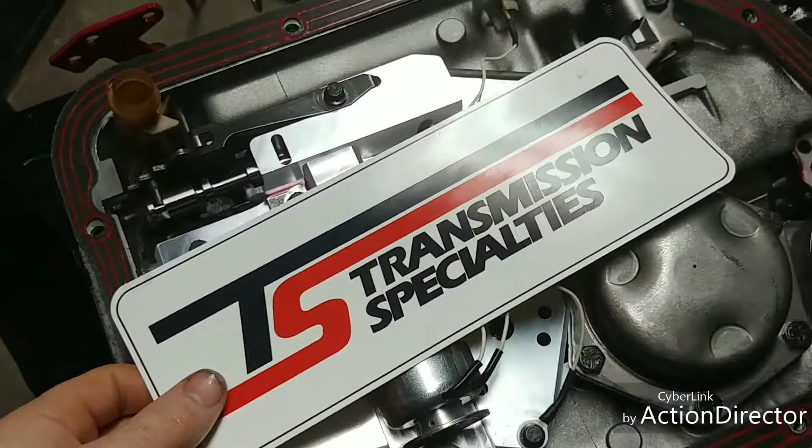Alright guys, TS Transmission Specialties, and this is our billet aluminum transbrake valve body for our TH400.

As you can see, there's actually not much to it. You got your transbrake here, and a real nice machined billet piece. I think Jegs sells these too under their brand name, but no... weird looking maze on the back. It's pretty straightforward - you got your park and neutral circuits, your reverse, and your 3 forward gears.

So anyhow, with this transbrake, the instructions say that you can put it in reverse or neutral to back up, but you will need to hit your transbrake button to complete the reverse circuit, so it applies fluid to your band and you can back up.

Nothing real difficult as far as putting it on. Kind of caught me off guard - I'm used to using valve body gaskets. This uses an aluminum separator plate and no gaskets between either the valve body or the case. So I assume that they figure the aluminum's soft enough to take up any minor imperfections in there and seal everything up.

They do recommend using like a whetstone or something to go over the case to make sure that there's no high spots on your transmission case. But other than that, you know, torque your bolts down. Make sure you put a little bit of ATF on the threads just to help lubricate them. Torque your bolts - I do like 100 inch-pounds on them.

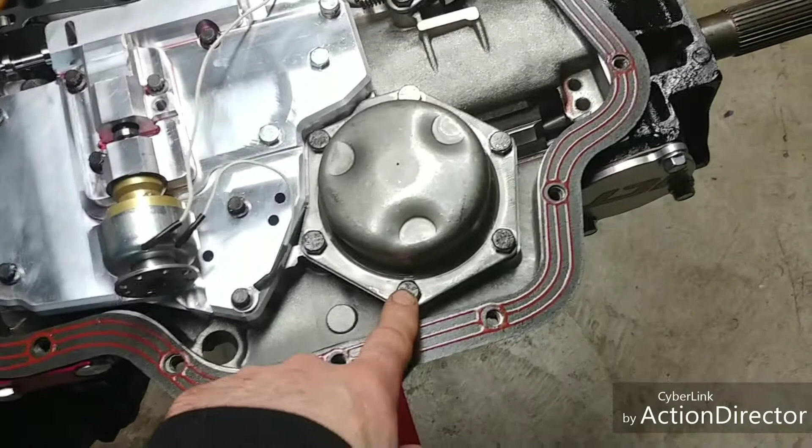So this might have been because on this rear servo cover, I ran what they call a low drag reverse shim, and what that does is it spaces this rear cover up like, I don't know, 120 thousandths of an inch, just to allow the rear band piston to relax fully so you don't get band drag on the rear drum. But the bolt may have been just a tad short.

The threads are cut pretty deep down in there, so I just got a longer bolt and ran it further down. Worked good, torqued good, everything's good there.

I know there are ways to adjust these rear band pistons, and usually what guys will do - you can find it online - is use a spare cover, drill a hole, tap it, thread a bolt in here, and cut this servo cover in half, then take some measurements as far as where the band actually starts to apply and where it releases. There's all sorts of adjustment stuff in there. I don't think I'm skilled enough to do all that and make an in-depth video, plus I don't have the servo and the spare cover to cut in half.

So anyhow, it didn't have any issues factory. When I took it apart, the band was actually in decent shape, and the drum was in decent shape. So I don't know, we'll let it ride, see what happens. If something goes south there and we have to pull this back out, well, you and I will learn at the same time then.

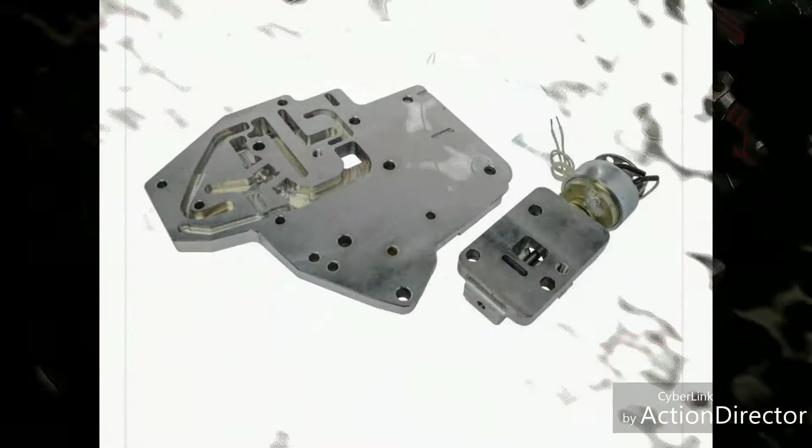I'll see if I can throw a picture in here of the backside of the valve body. I really wanted to do just an overview of the valve body and its individual pieces for you guys, but unfortunately I don't have the video, and at this point everything is installed and torqued, and doesn't make any sense to take it back apart.

So when you're putting it all together, make sure you clean everything before you install it, because the last thing you want is maybe the manufacturer missed some shavings and stuff when they were machining this valve body, and you got something in there. So just clean everything up real well, lubricate everything, lubricate your spool valve.

When you're installing this, sometimes these might have a little wobble to them until you get all the bolts tightened up. Just make sure that your valve goes in nice and easy and it's not bound up on anything. Lubricate your trans valve, your transbrake solenoid there. Make sure that all works nice and good, and just be careful tightening the bolts up, and follow your directions that come with your valve body.

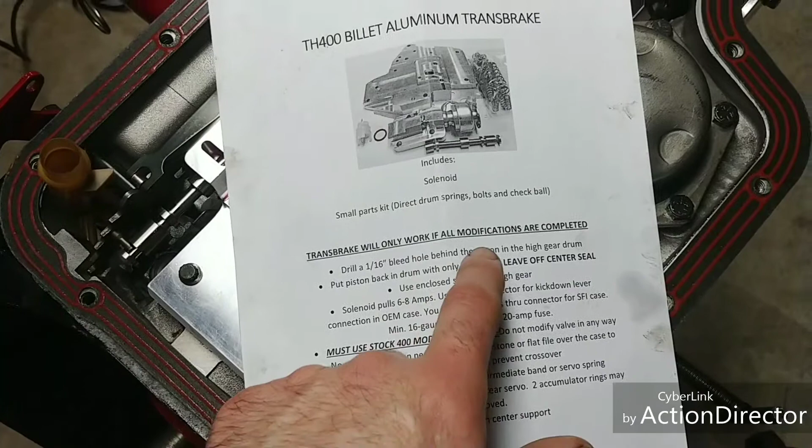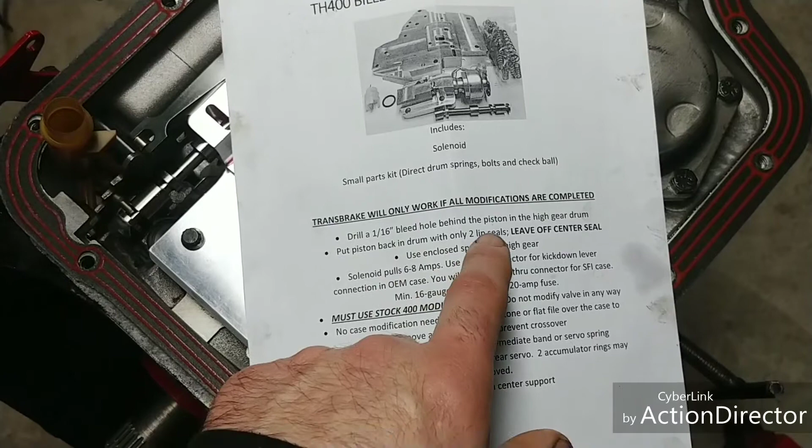But you are going to want to, this is why I kind of did this build, because there are modifications that you have to do. We went over drilling a 16th inch bleed hole in the direct drum, or they call it the high gear drum, whatever. Put the piston back in the drum with only 2 lip seals, leave the center seal off. We did that. They come with heavier duty springs for your direct drum, so we installed those.

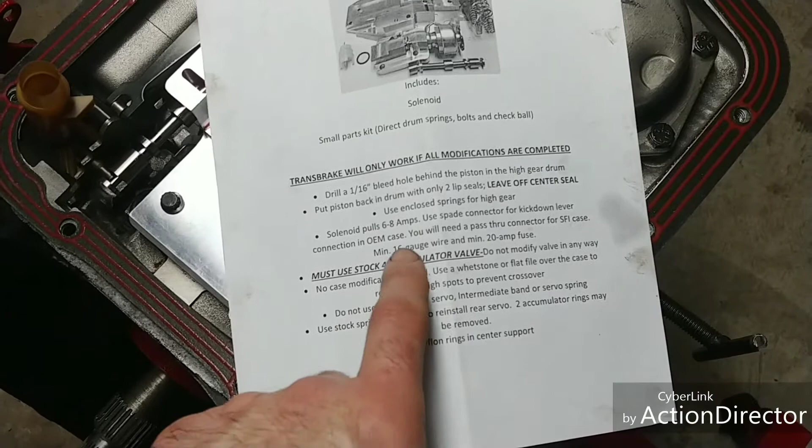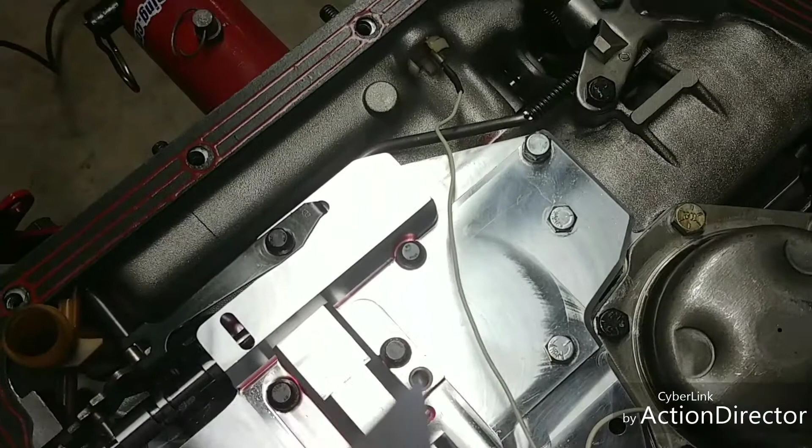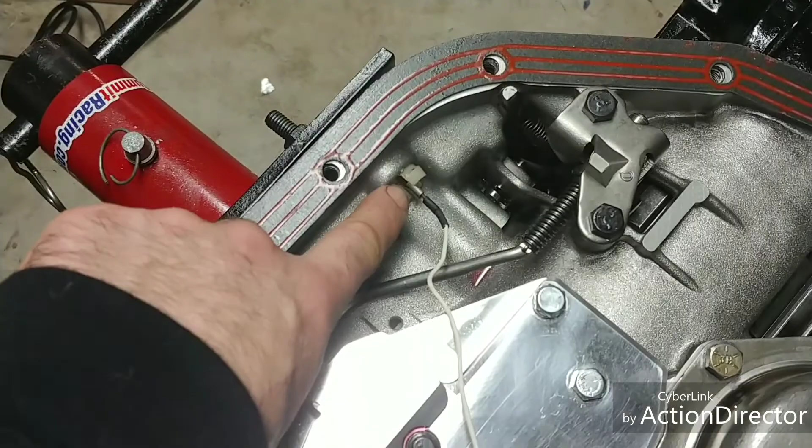It's got some electrical specs here. Solenoid pulls 6 to 8 amps. Use the spade connector for the kickdown lever. So in this one here, if you remember, originally right about in this area, you would have had a kickdown solenoid, and you would have had the little plastic feed through here. You got your terminal on the outside comes through, so that's what we're going to use now for our power for our transbrake. And then they just give you, you just ground it to the case here.

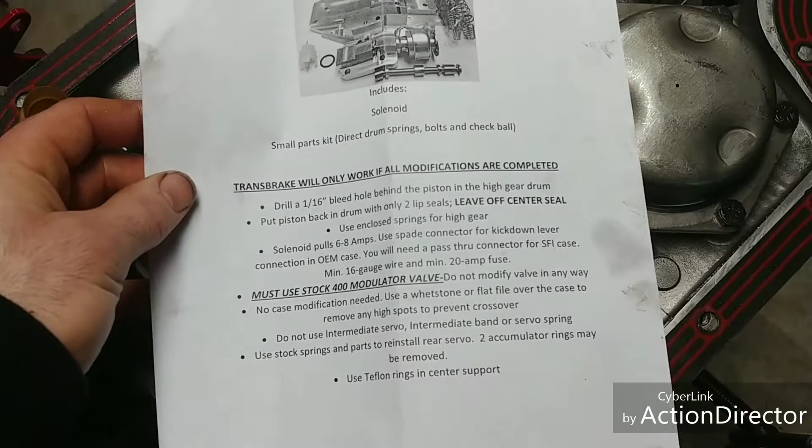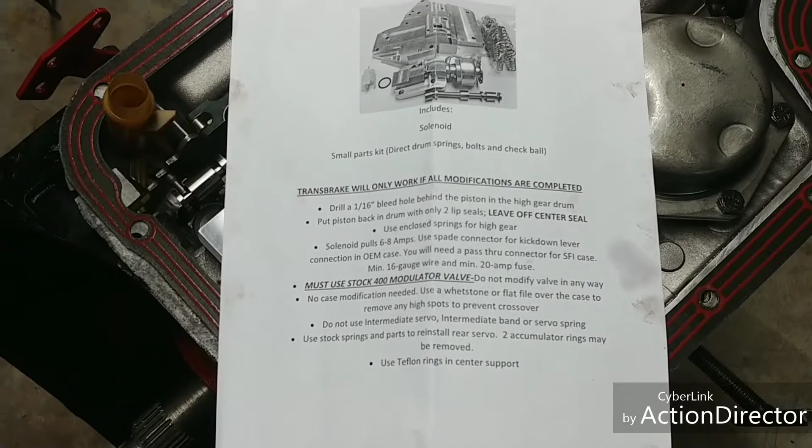So solenoid pulls 6 to 8 amps. You need a pass-through connector for an SFI case. I don't have the cash for an SFI case, so I really don't care what the hell they're talking about as far as a pass-through connector. If that is your situation, Google's your friend. Minimum 16 gauge wire and minimum 20 amp fuse.

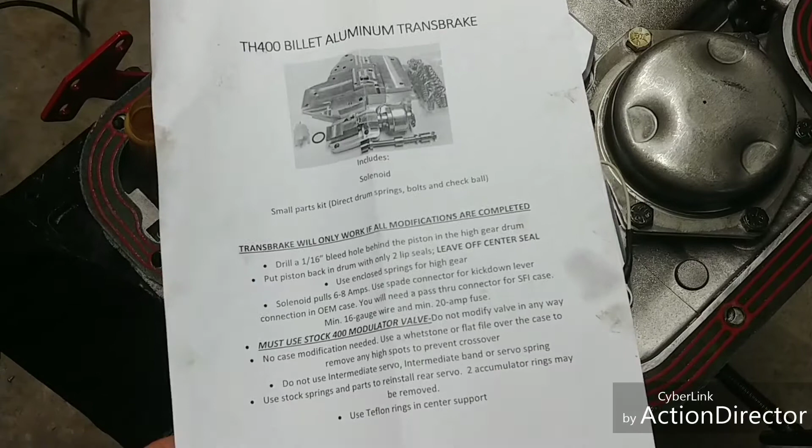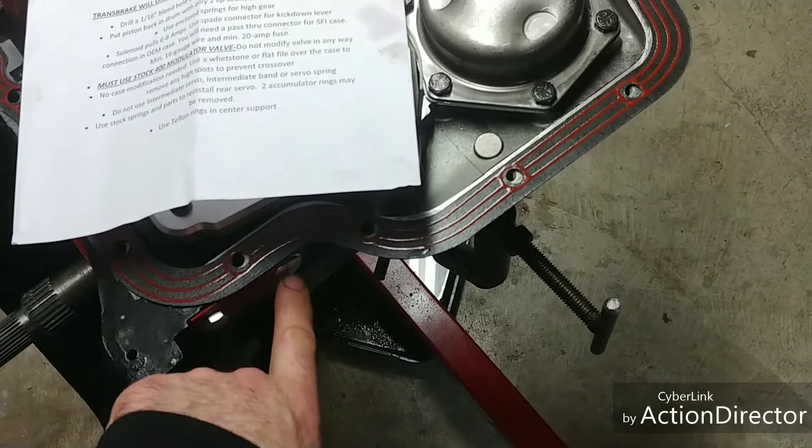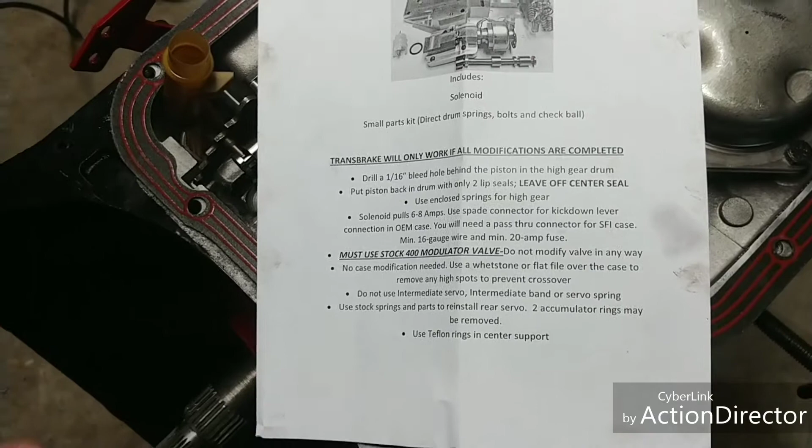Must use a stock 400 modulator valve. So your modulator valve in here, where you would have your vacuum modulator, they give you a plug. You have to use an unmodified modulator valve, so do not grind it or anything. There's different modifications out there for valve bodies, like stock looking stuff, and they want just stock.

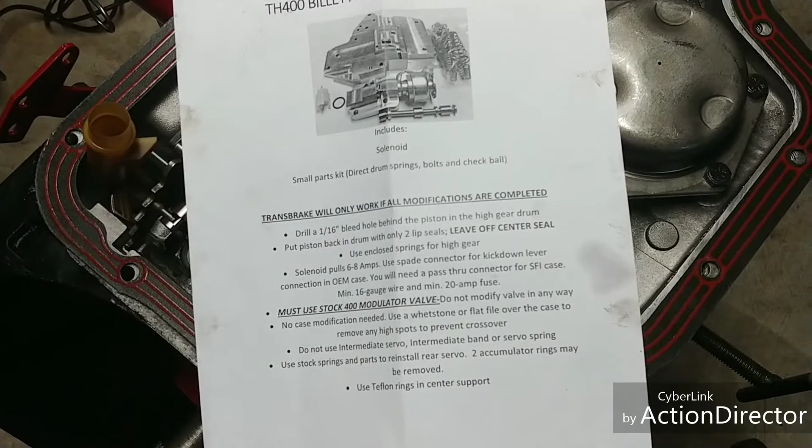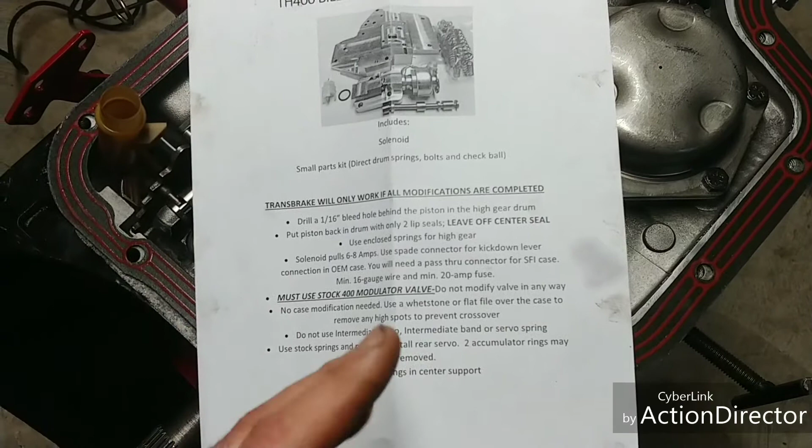No case modification needed. Use a whetstone or flat file over the case to remove any high spots to prevent crossover. Obviously, you would want to do that before you assembled everything and before you did your final cleaning of your case to assemble it.

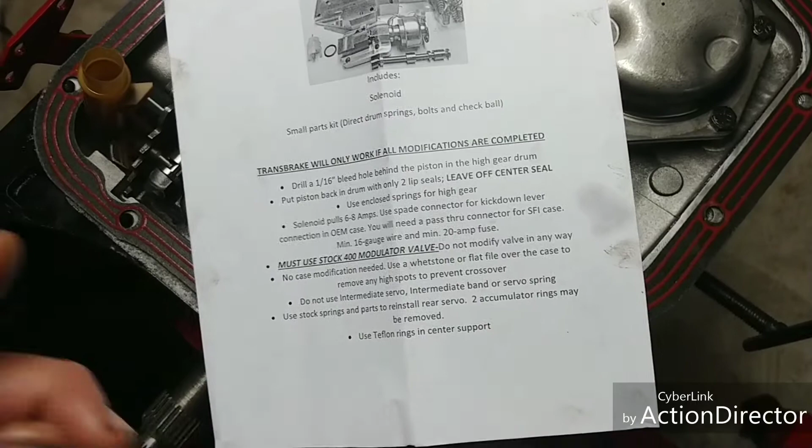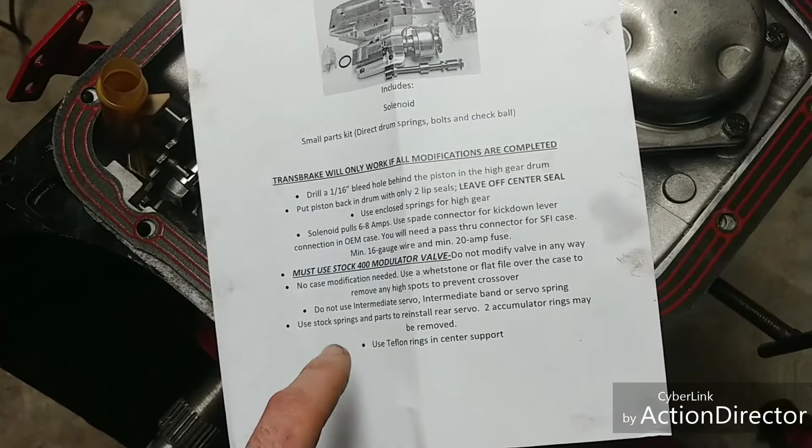Do not use the intermediate servo, intermediate band, or servo spring. We don't have an intermediate band in this one. We removed the servo. Remember, that's where our case saver goes, the 1 bolt to locate that goes up through. Use stock springs and parts to install rear servo. Did that. The 2 accumulator rings may be removed. So the accumulator is still in there, but there are no sealing rings on it.

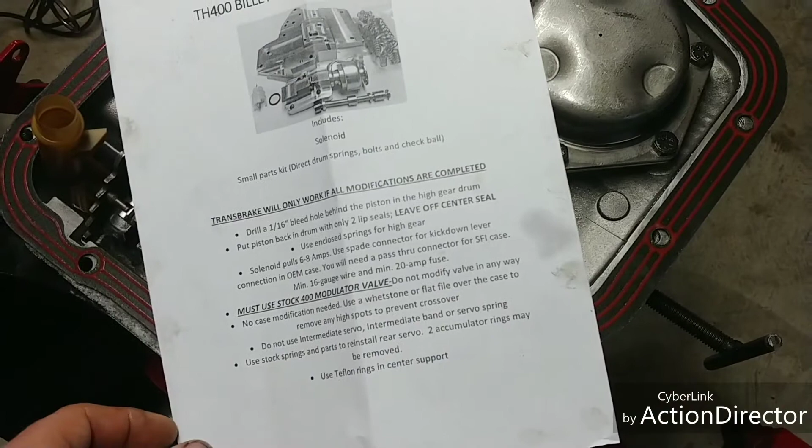And they recommend Teflon rings in the center support. So, all in all, I don't know if you can see that real well. That's what the back side of the valve body looks like. Very minimum passages. They're showing you an area there where the check ball is. I know it's not real great, I'll see if I can get a better picture of it.

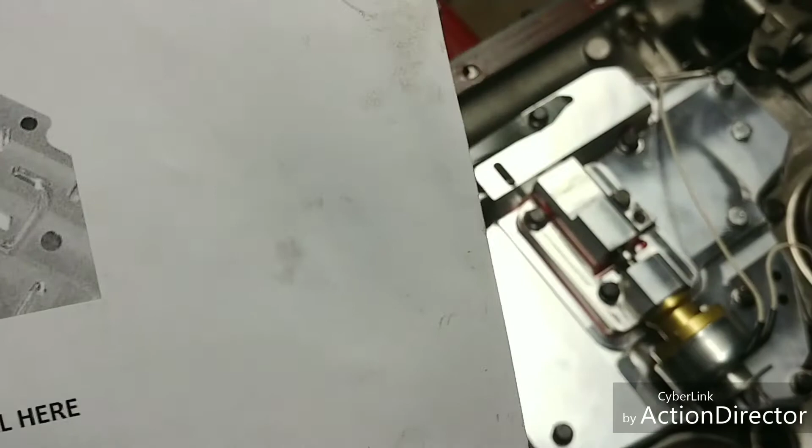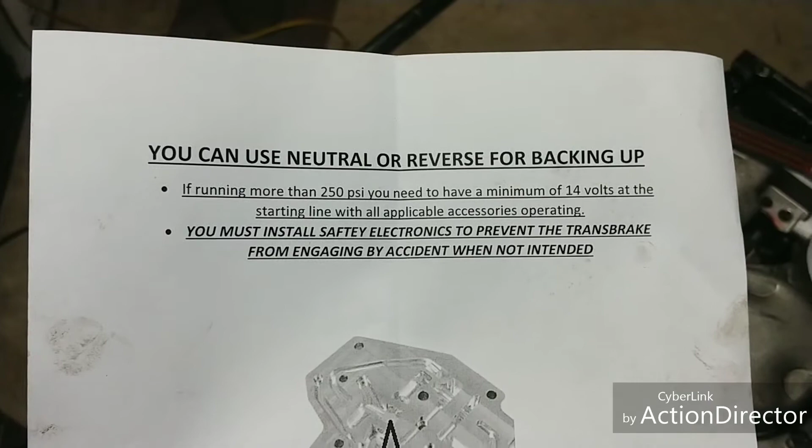You can use neutral or reverse for backing up. If you're running more than 250 PSI, you need a minimum of 14 volts at the starting line with all applicable accessories running. So make sure you have a good battery and alternator in your vehicle.

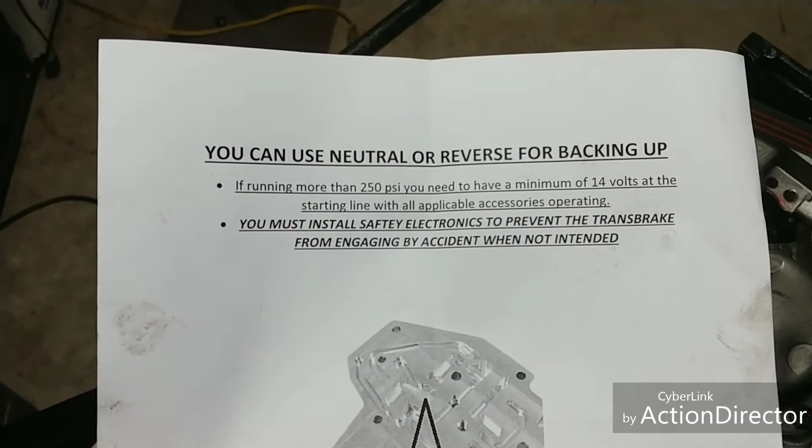You must install safety electronics to prevent the transbrake from engaging by accident when not intended. So pretty much what I planned on, and just run a single toggle on and off switch between your power source coming into your transbrake button, so that you can break that circuit. So if somebody accidentally bumps the transbrake button while you're going down the road, you don't scatter this thing all over the place.

So anyhow, that is about all I can offer you guys as far as this. It's not really an install, just more of an overview and kind of an update as to where we're at on the transmission.

I am gonna get the filter in this thing, get the pan buttoned up on it, and I gotta put the tail shaft housing on it yet, and we are about ready to rock and roll and get this thing in the car. So stay tuned, and I appreciate you guys watching and your comments, and hopefully we'll get this thing in the car, go make some, well, hopefully it works, right? Remember, I'm not a transmission builder. This is my first time doing this, so, you know, we'll see what happens, but stay tuned.